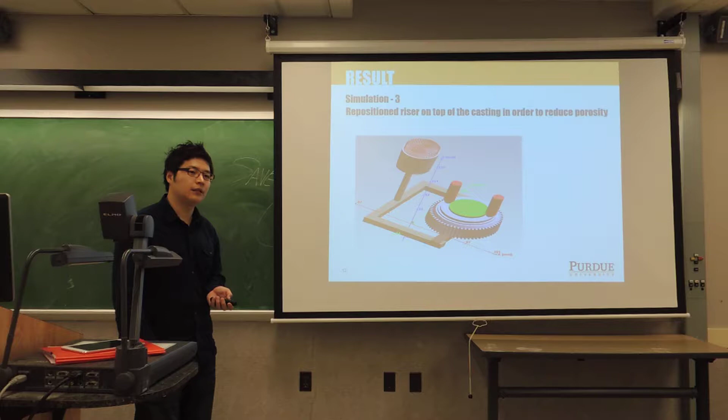So each simulation is just 30 minutes or 1 hour. Even the mesh, because after making the 3D modeling and converting the data to the MAGMA program, I have to mesh it. That means I have to make very small, tiny mesh on all the surfaces of the model - 10,000, up to 1 million meshes. How many meshes I make influences the time to simulate using the MAGMA program.

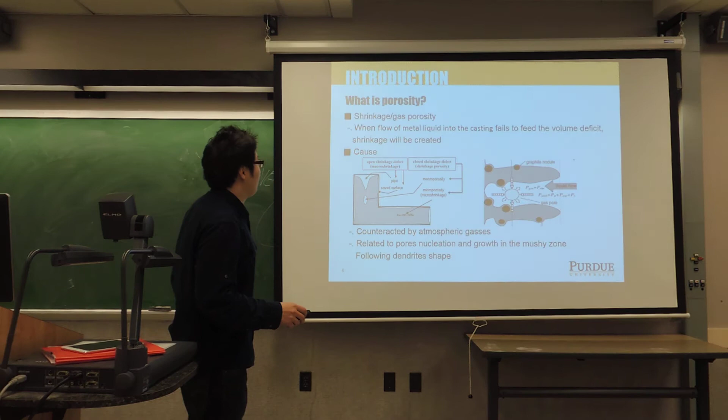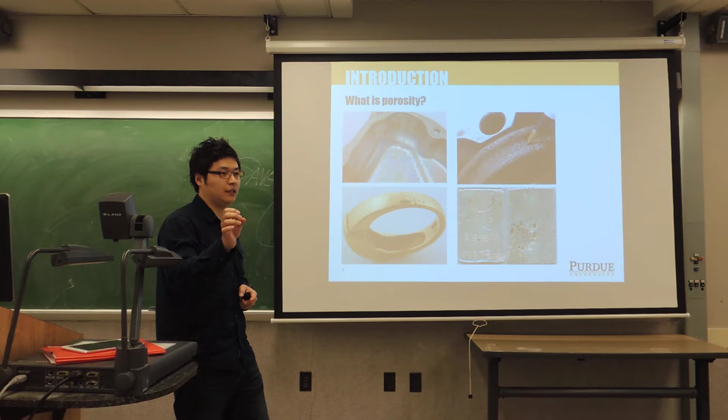Yeah, that's a good question. Even though many engineers use the MAGMA program, people still make the real metal casting to find any casting defects. There are some porosity issues. The MAGMA program is not perfect - it cannot 100% find the porosity, but it can find some dangerous locations, like this, like this.

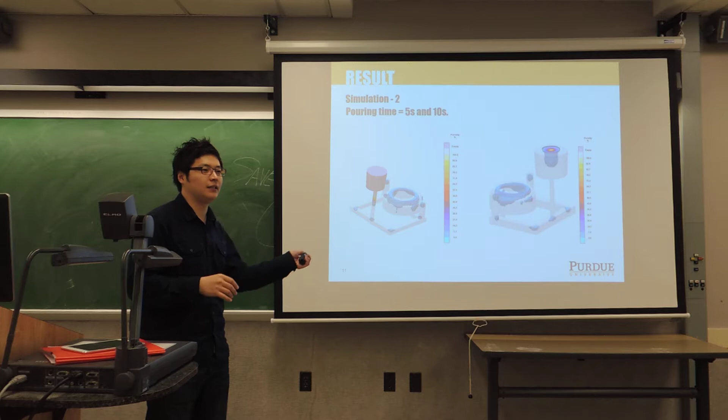Major errors, right, okay. Actually, in my area, simulation doesn't predict much. Yeah, I think... so I can't guarantee the MAGMA program is 100% precise to find any metal casting defect.

Are you expecting to validate this with some experiment? Are you expecting to validate these simulations with some experiment? Yeah, with a normal experiment.

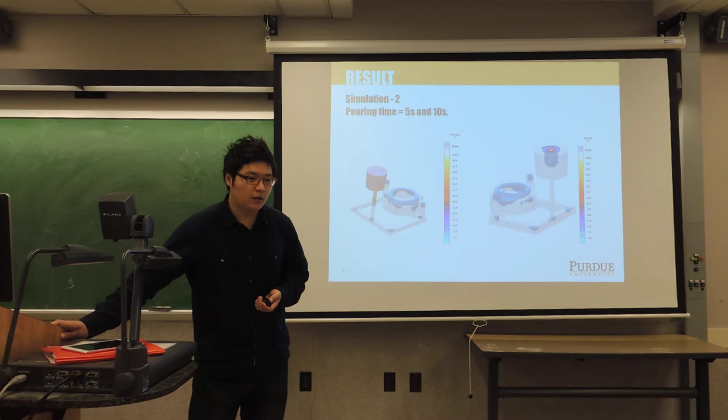Just not computer simulation, if not making it with an experiment. You mean it's possible to make metal casting without the computer simulation, or?

No, what I mean is, you have some simulation that shows you which is the porosity - which is porosity, the real product? Yeah, exactly. So normally how it works is you make the simulation, then you cannot trust it 100%. So you have to do an experiment that validates the simulation.

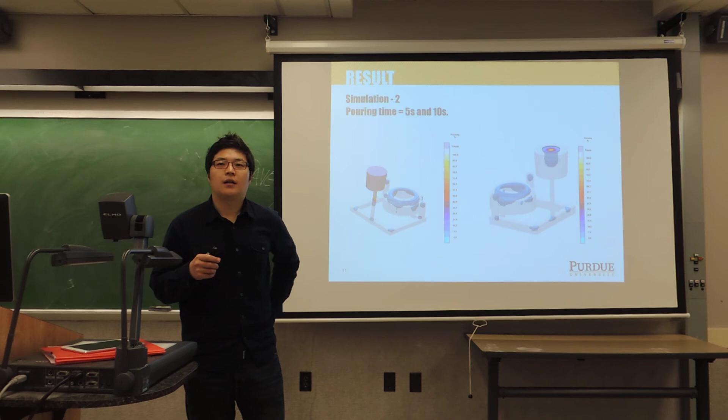Do you understand his question? No. So this is all about simulation, right? Yes. So there might be some discrepancy between what is happening during simulation and what is actually happening in the real world. So are you planning to do some sort of experiment to validate your simulation?

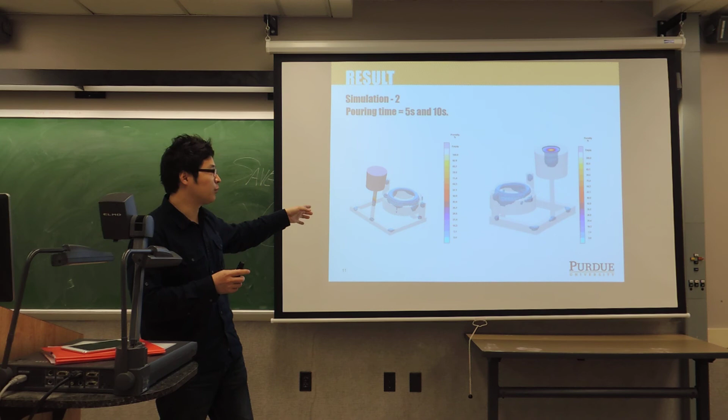Actually, this is complete just as a simulation with this MAGMA program. I didn't do any experiment. The purpose of this project is to find and make a formula using the MAGMA software to find any defect in metal casting design.

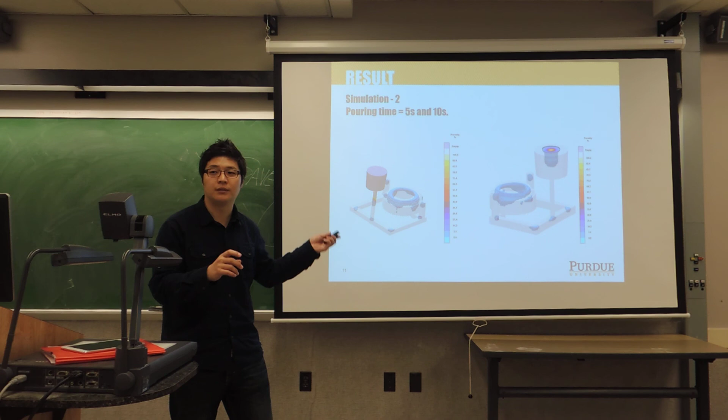So next semester, if I continue working with my professor, I will focus more on an exact experiment to find the defect of metal casting and make a real design of the product.